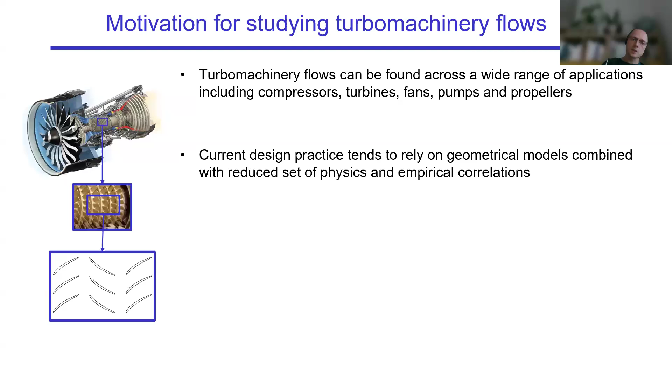Current design practice for those rotating machinery tends to rely on geometrical models combined with reduced set of physics and empirical correlations. These methods are well validated for existing systems, but the problem is that if we're trying to design outside of past experience, these methods are not validated for them anymore and they struggle, which means that design innovation requires accurate modeling beyond the current design envelope.

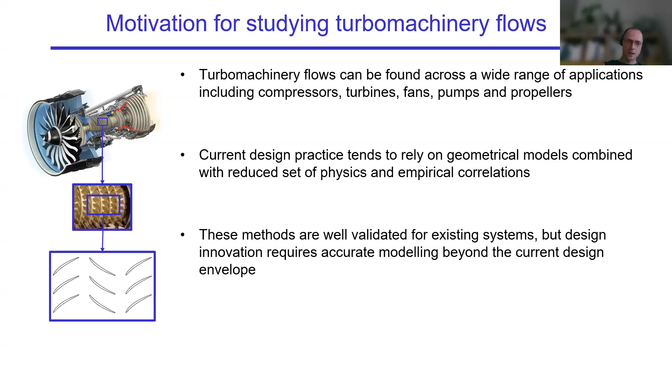Then on top of the limitations of the low fidelity methods, some of the methods require certain assumptions. For example, URANS requires a so-called spectral gap between deterministic and stochastic unsteadiness, which is that gap represented between the large and the small scale, which is in practice hardly ever present. The design trends tend to be such this gap becomes smaller and smaller or non-existent as the machines become more compact and work on higher work coefficients or require more work to be done.

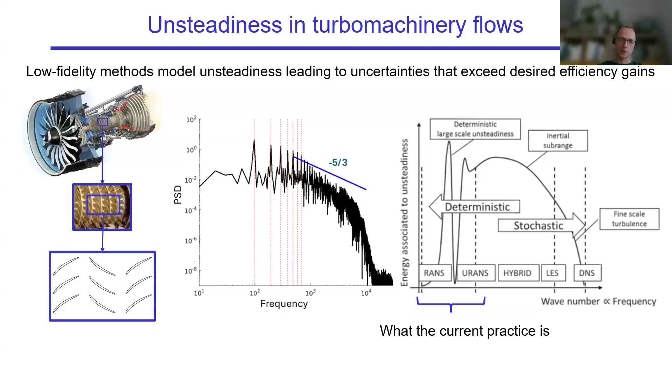So if we look at what such a flow field may look like, here is an idealized compressor made up of stationary and rotating parts. What's interesting about it is that axial compressors offer an interesting test case for studying unsteady interactions. So it's both interesting from the fundamental perspective and from the practical perspective, since those flows are a backbone of power generation and aerospace aero engines.

So they're worthwhile studying. Even starting from clean inflow, we can see that there's a lot of unsteadiness that gets generated across the flow path, and that unsteadiness arises due to the propagation and accumulation of wakes and due to turbulence generation in upstream passages. So the turbulence that we see here, obviously there is some component of it at the very end. I don't know if you can actually see, maybe I can use the laser pointer here.

The turbulence or the unsteadiness that you see at the end has some coherent or discrete component due to rotor wakes, but a lot of turbulence in between comes purely from accumulation from previous stages.

What's also interesting is that after several blade rows, turbulence reaches a sort of equilibrium as overall passage turbulence production balances the dissipation. So if we take, for example, this blade row and this blade row, and compare them on a statistical basis, you'll see that they're very similar to each other. So at some point, those turbulence quantities and their impact on the flow field sort of saturate and become repeatable to an extent.

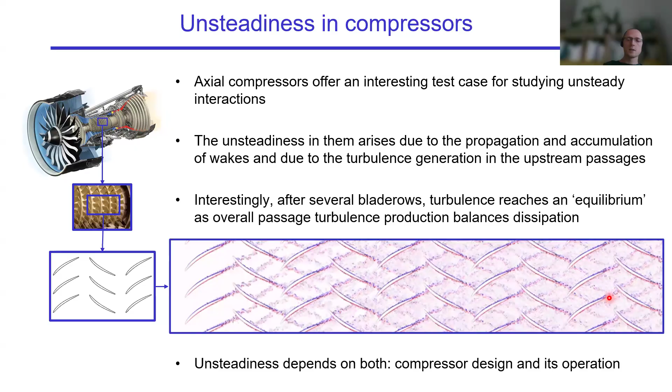Another thing to mention is that the unsteadiness we see here depends on both compressor design and its operation. So as an example, we can look at one of the design choices of the multi-stage compressor.

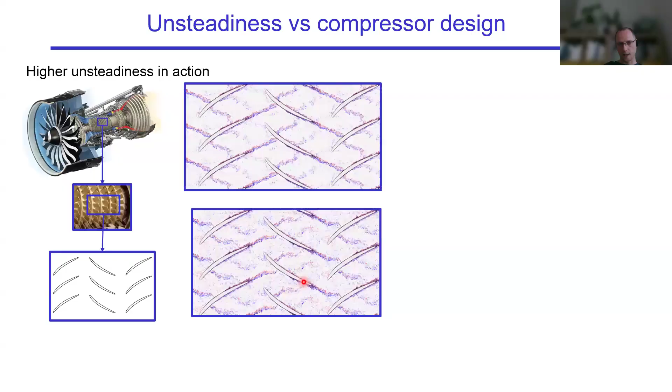If we take a baseline design and decrease the gap sizes between subsequent blade rows, this has an impact on the unsteadiness that those two flow fields show, and that translates to, for example, higher deformation of wakes, higher unsteadiness levels, etc.

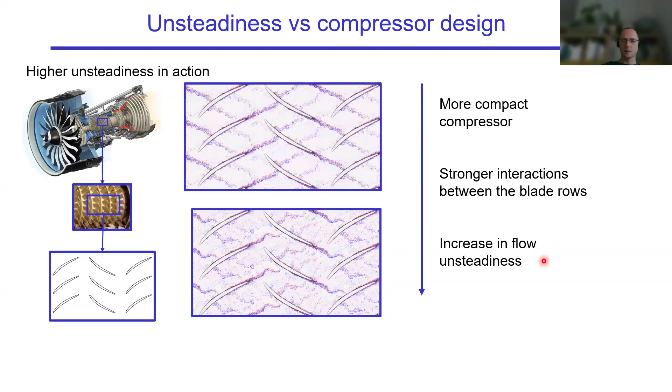So this can be summarized into this flow of thoughts: more compact compressors lead to stronger interactions between the blades, and that tends to increase flow unsteadiness. It's important to consider because turbomachinery blading has to be designed to operate in those highly unsteady environments. At the moment, that is hugely simplified.

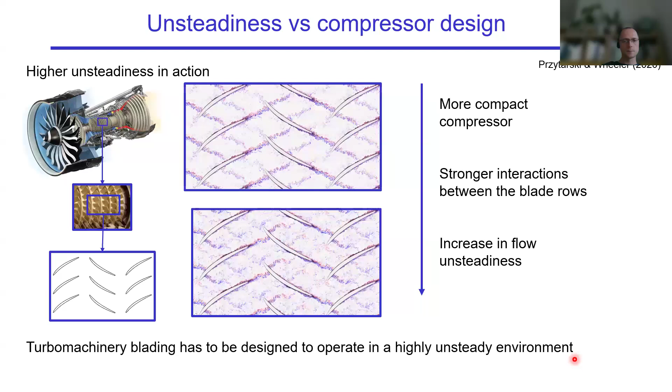Another aspect of it is that unsteadiness depends on the operation. Even though we may design compressors for the cruise conditions of a plane, which is where the gas turbine operates most of the time, it also needs to be able to handle conditions at takeoff, during the ascent, and during the landing descent.

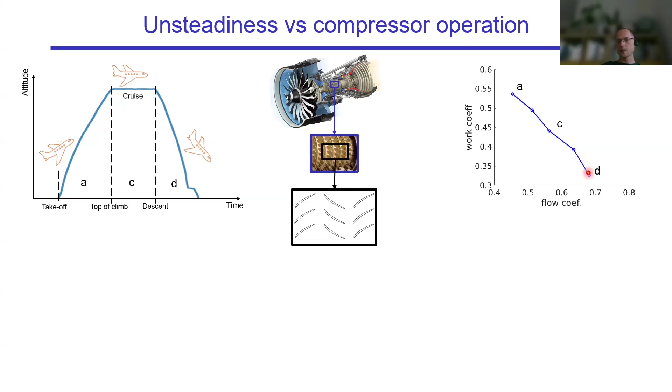That translates to different places on the so-called compressor characteristic, with descent requiring less work than ascent. That also translates to very different flow fields, which we can also look into. So this would be the on-design conditions, the conditions that the compressor would be designed for, which minimizes the loss.

On the left-hand side, we have this takeoff condition that is highly unsteady, and you can see a huge difference in the flow field, specifically due to the thickening of the suction side boundary layer, which then translates into a more unsteady flow field downstream, and that has a kind of feedback effect on the blade.

And on the opposite end, during a descent, the pressure side, so the bottom boundary layer, thickens, and that also increases unsteadiness to a certain extent, but not as much as in the first case.

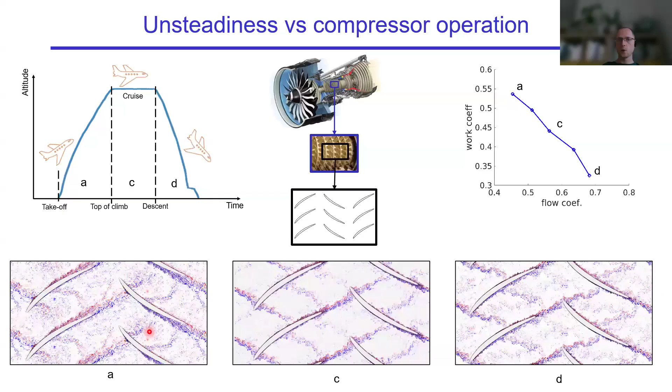And then we can statistically characterize those flow fields. For example, we can compare them to some experimental data from different research compressors. These are the C106, CIT, LSRC—so these are the Cambridge University compressors. These studies were done in the past. The blue dots correspond to the simulations that I showed you last.

This point corresponds to our descent condition, so when the plane is landing, and this condition corresponds to our ascent, where the plane is taking off. You can see that the trend roughly follows what the experimental compressors show. The differences are due to design, the simplifications of the setup, and so on.

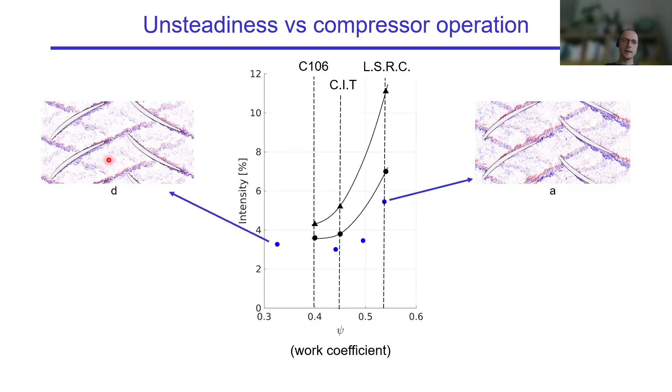And then we can also look into those flow fields and extract the free stream spectra. By the way, in case it wasn't clear, all the data I'm showing is computational. These are scale-resolving simulations, of well-resolved, highly well-resolved LES/DNS resolution.

And these spectra come from those computational simplified setups of multi-stage compressors. You can see how the spectrum changes between those two cases. I'm not going to go too deep into it, but this is just to show you that unsteadiness plays a big role, and it's dependent on both the operation and the design of a compressor.

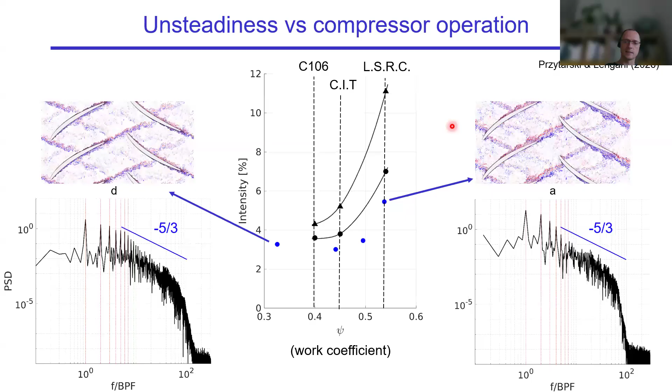So that's a little bit of background on why it's worthwhile to study the unsteadiness and why it's both interesting from a fundamental perspective and from the kind of industrial application standpoint.

Now going to large-scale flow decomposition. High-fidelity simulations, like I showed you before, are very expensive. These sorts of simulations would take millions of CPU hours or tens of thousands of GPU hours. So it's important to extract knowledge and derive models from them as much as possible.

Historically, or typically, we would collect flow data sets—time-averaged data, phase-averaged data, maybe probes in the free stream, snapshots for visualization purposes. But the problem is that you already need to have a hypothesis on what sort of physics you're fishing for before you define those data sets that you're planning to create and collect. So standard approaches utilize only a fraction of available data and tend to rely on expert-driven analysis—you as an expert need to decide what you're interested in before you perform such a simulation.

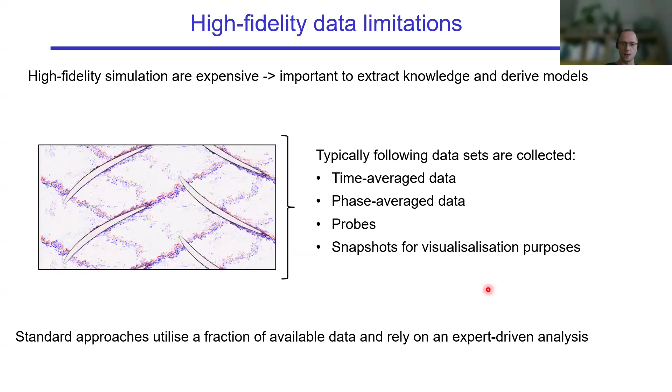So an alternative to that is scale decomposition applications. Many people have heard of methods such as POD, proper orthogonal decomposition, DMD, dynamic mode decomposition, and such. What these methods allow us to do is split the flow into multiple components.

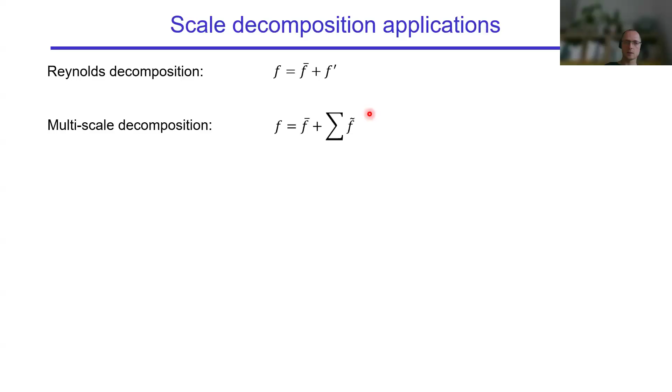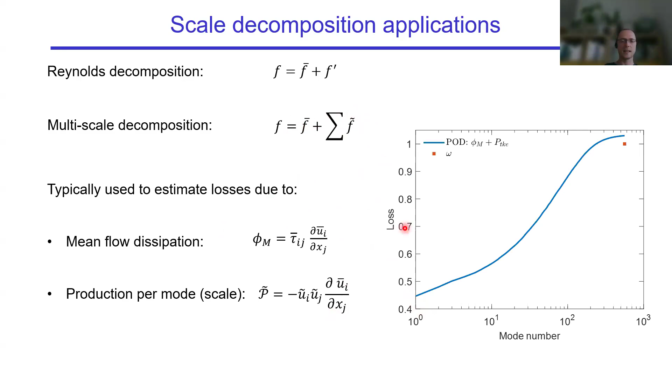Instead of performing a standard averaging, the so-called Reynolds decomposition, where we split the flow field into mean and fluctuating components, we can perform a multi-scale decomposition where we retain the same mean, but then have multiple modes which build or correspond to our flow field. This analysis tends to be used to estimate losses due to various dynamics. We can compute mean flow dissipation due to mean strains and the production per each scale or mode, which tends to look like this, where we can quantify loss or turbulent kinetic energy, production, dissipation, versus a mode number.

That's all nice because it helps identify lossy dynamics compared to the classic Reynolds decomposition, but it has certain limitations. Nonetheless, it's a good first step to create a multi-scale description of the flow.

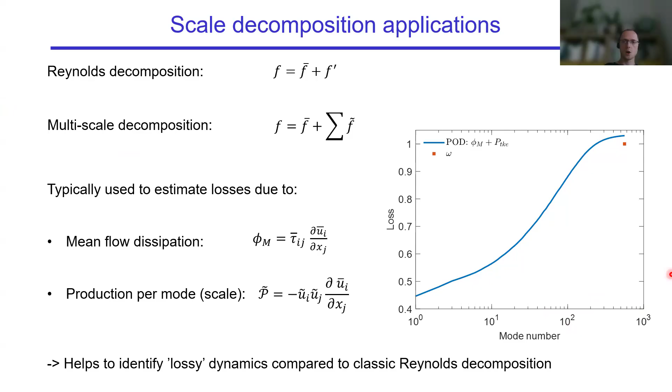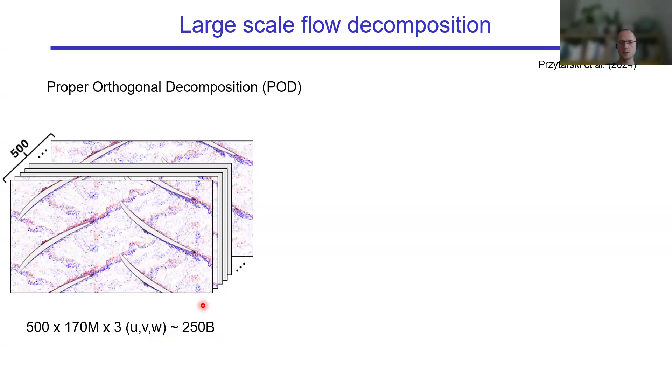To perform that, I'm going to show a method using proper orthogonal decomposition, where we collected 500 snapshots of this simulation. The section of the simulation I showed you corresponds to roughly 170 million points, and we collect 3 velocity components, UVW. That corresponds to roughly 250 billion points altogether. You can put that into a huge matrix and solve an SVD problem that splits the flow field into spatial modes and temporal coefficients.

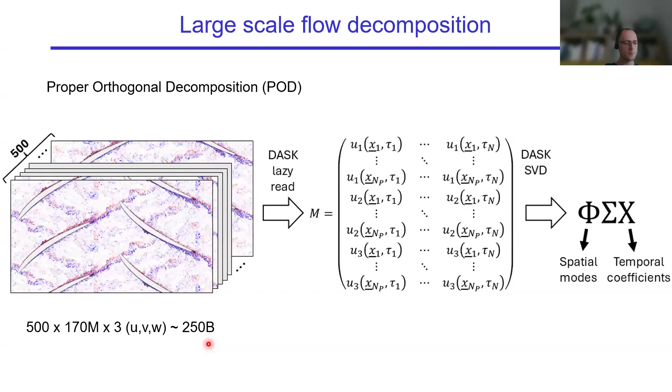To show you what those look like, here is a selection of modes that proper orthogonal decomposition gives you. Mode 1 is strongly related to the wakes that the upstream rotor leaves, and you see strong signatures of those rotor wakes. Mode 40 corresponds to large-scale structures within the boundary layer, and mode 400 to small-scale structures. This gives you an idea that POD decomposes the flow and sorts it into dynamics or scales of different size.

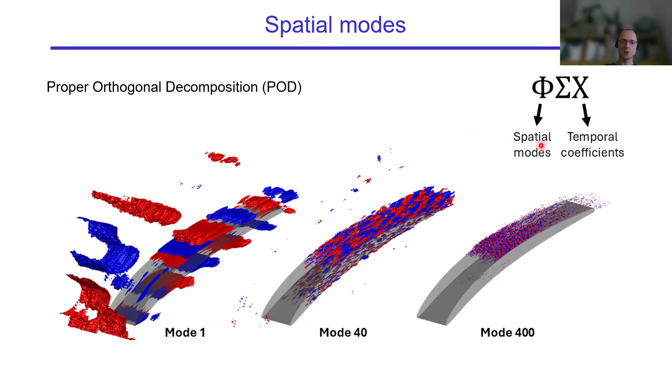Together with spatial modes, each spatial mode has an associated temporal coefficient attached to it. Mode 1 has a purely sinusoidal, periodic, repeating pattern of temporal coefficient. Mode 40 looks like this, and mode 400 looks like that.

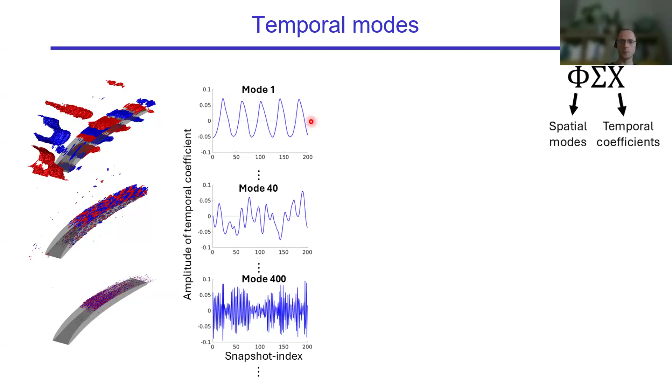To give you a better idea of what POD did and what those modes correspond to, we can perform an FFT, fast Fourier transform, on each of those signals, and construct this spectrogram of sorts, where each mode can be translated into frequency and put on this graph. We see that mode 1 was purely related to the wake dynamic, with a single frequency present in it. Mode 40 has a broader spectrum that doesn't correspond to any of the frequency peaks. At the very bottom you see a broadening of spectra, which corresponds to dissipation scales within our flow.

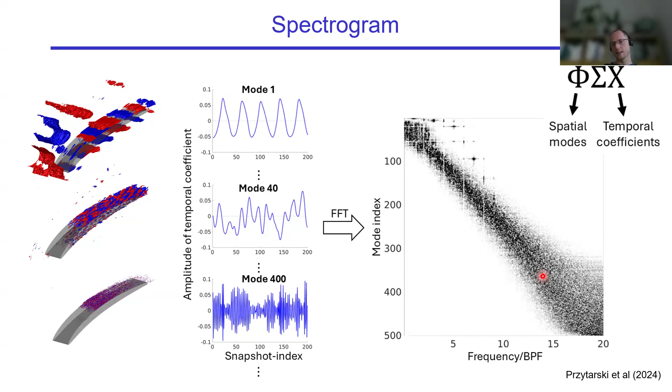If this reminds you of something, I'll be a bit suggestive, and compare it to our freestream spectrum, which looks qualitatively quite similar, where we see those peaks also represented through the mode decomposition. You have a fairly broad inertial subrange, depicted here as this linear band of frequencies found by the mode decomposition, and then a broadening of spectra due to the dissipation spectrum at the bottom.

So data-driven methods such as those can identify and isolate dynamics and coherent structures within the system. That's pretty convenient. Now that's not all the story, which leads me to the next point: the multi-scale kinetic energy transport equation formulation. While those data-driven methods can decompose the flow and characterize it on a spectrogram like this, giving a nice qualitative understanding of what's happening and which mode corresponds to what dynamic,

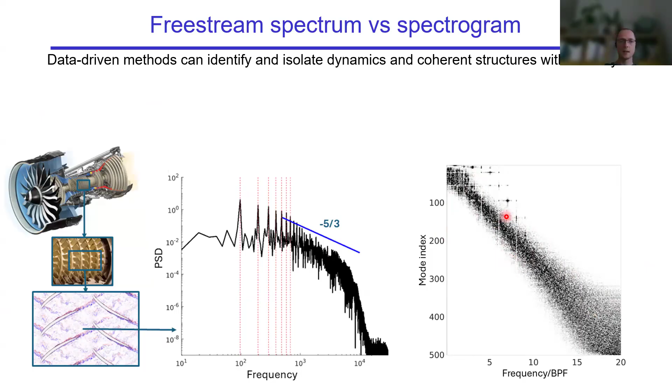the dynamic importance of each mode is actually unknown. That information, which modes are dynamically important for the flow physics, is embedded in the so-called triadic interactions. These interactions show the pathway of energy from the mean flow to turbulent dissipation. Turbulence production calculates how much energy is extracted from the mean flow. Triadic interactions show how that energy, taken from the mean flow or the inflow or anywhere else, cascades down towards the dissipation scales.

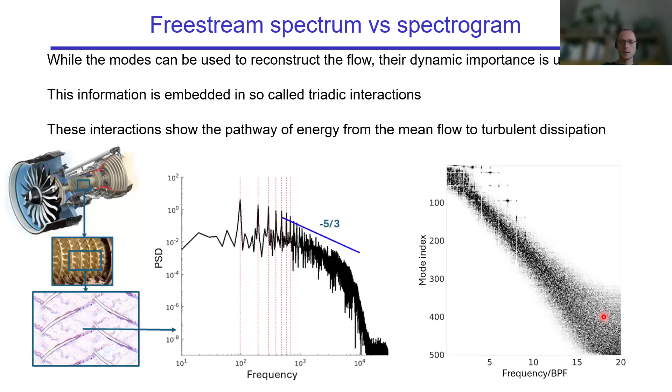Triadic interactions have this aura about them that they're difficult to understand. So I'm going to present an intuitive way to understand them, which will set up a framework for what I'm going to show you in the future.

Typically when we collect the data or decompose the flow, we do the Reynolds decomposition, where we split things into the mean flow and the fluctuating component of the flow, the so-called turbulent field. So our total kinetic energy can be split into kinetic energy and turbulent kinetic energy.

These two have their corresponding transport equations. As you can see, those transport equations are almost identical. The only difference is the operation we're performing on them, where advection or transport of kinetic energy or turbulent kinetic energy is equal to production, dissipation, and diffusion. Now these terms are similar but separate because of the different operator working on them, except for production, which is shared. That production is a very important term because it couples the two transport equations.

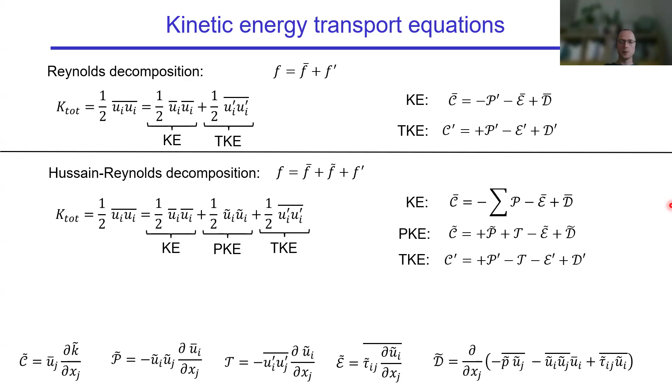But if we want to go to multiple scales, I kind of gave you an idea of what happens as you extend your decomposition into multiple scales. Instead of having three scales - the mean, periodic and fluctuating - you have mean and as many components or as many scales as you want.

So now total kinetic energy can be split into mean and turbulent kinetic energy. As before, the transport equation for the mean kinetic energy is exactly the same as with a triple decomposition. And the scale kinetic energy is effectively just an extension of turbulent kinetic energy and periodic kinetic energy. You can see that they both have a convection per scale, production for each scale.

There is a triadic component, or the transfer of energy, which can be both a sink and a source. You have a plus and a minus. There's a dissipation, and then there's the diffusion. So it's not such a big extension of what we've done in the Reynolds decomposition or triple decomposition to go from those two decompositions into a multi-scale decomposition.

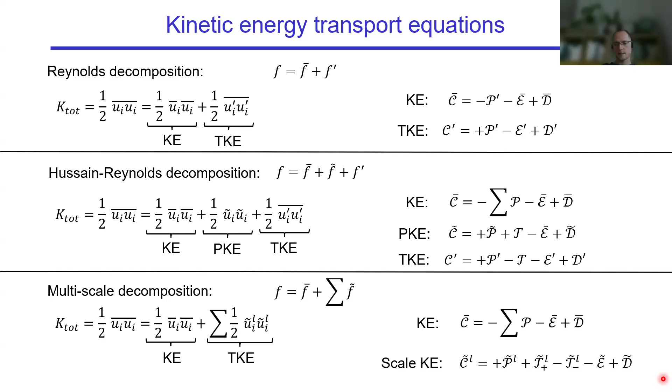And that's the sort of framework that we're going to keep in mind when we're going to discuss triadic interactions. So knowing that this is the case, let's try to quantify those energy transfer rates or triadic interactions.

If we look at the structure of these triadic terms, they look like this. This is similar to the production that I showed you before, where we have some sort of Reynolds stress and strain, except now those fluctuating or velocity components can relate to three different scales, L, M, and N.

That means that if we have many scales, we can potentially have interactions between all of them to the power of three. So for example, if we have 100 scales, each one of those 100 scales can interact with any 100 scales and another 100 scales to create a triadic interaction. That's why it's called triadic, because you have three different scales interacting with one another to manage the flow of energy.

So for our case, because we have 170 million points, and those triadic interactions can happen at every point of the domain, we have 170 million points. We have 500 snapshots, which means we have potentially 500 scales, and they can interact in any combination. So we have potentially 170 million times 500 to the power of 3 potential triadic interactions, which translates to a very large number of 2 times 10 to the power of 16.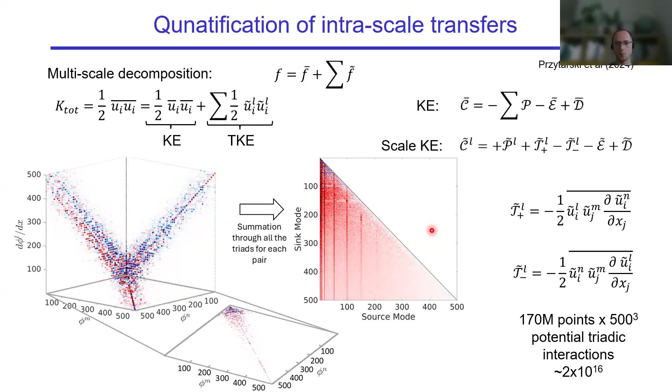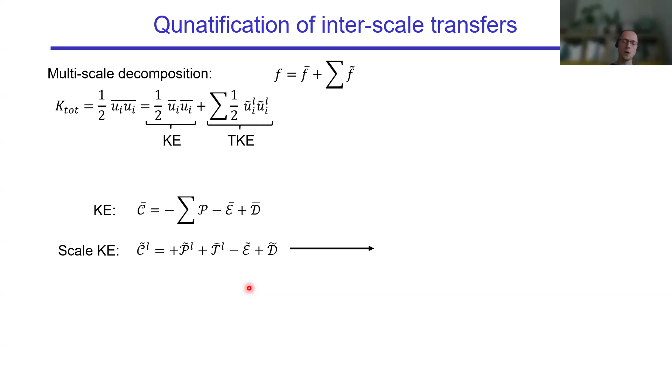Now, once we have everything split up into those scales, we can also perform budgets on those flows. So for each scale, we can quantify the production within the flow. We can also quantify the dissipation, how much each scale contributes to it. And we can show the net triadic effect or net triadic transfer each scale has.

What it means is that the scales below the zero line on the net act as a source of energy and transfer energy down the cascade. And on the positive end of the spectrum, those scales on average receive energy from the larger scales.

We can also quantify advection, and the work to obtain all the diffusion terms is still ongoing, but we can see what the residual for each one of those scales is. That still requires future work, but it shows we're very close to balancing the budget, not just for the entire flow field or just in the boundary layer.

We're balancing the budget of scale kinetic energy for each scale across the entire spectrum. And we can understand what role each one of those scales plays in this behavior that is governed by those scales.

For example, the very interesting point on the triadic transfer rate, the blue line, is the crossover point, where these scales are mostly generating energy and sending it down the spectrum, and these other scales are only receiving energy.

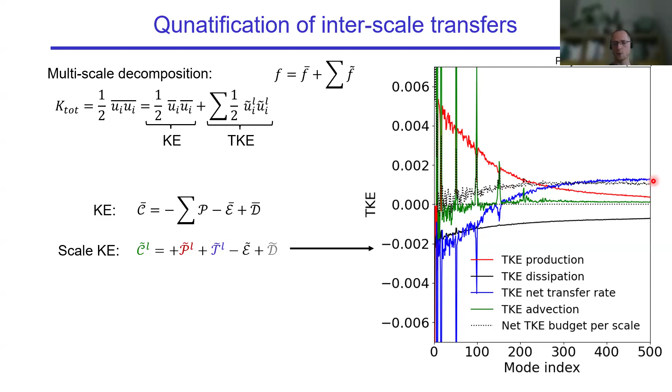Now, I don't know if we have enough time, because I'm not sure how long the presentation is supposed to be, but I can talk about the impact of the state space. I'm going to skip through those slides and jump into the summary and future work, and if we have time during Q&A, I can revisit those topics. I'm just going to jump through this, and then we can come back if anyone wants to discuss it in more detail.

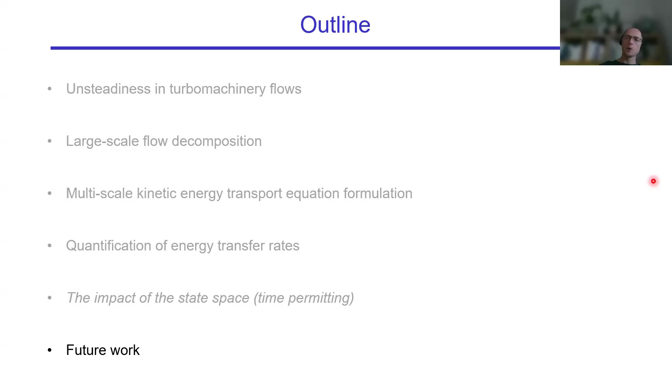Now, finally, we were able to both decompose the flow and quantify all the triadic interactions within it, so we can discuss the future work. This decomposition and evaluation is very powerful because it allows us to transform this complex simulation and represent it in the form of a dynamic system.

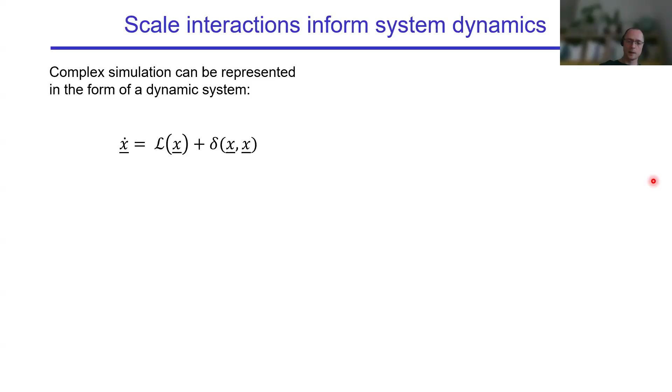It's a very popular idea that has been pursued by multiple authors. But what it basically means is that now that we have decomposed the flow into spatial modes and triadic interactions, we can effectively transform our flow into a problem where the derivative of the flow is the sum of a linear component and a nonlinear component, where the linear component corresponds to those spatial modes and the nonlinear component is effectively embedded in the interscale transfer rates. Many people study that; for example, the DMD method tries to estimate that linear relationship.

This stems from the Koopman analysis, while resolvent analysis tries to understand the impact of forcing on the amplitude of the flow and how the two are related. The fact that we can decompose the flow and evaluate both terms means we can construct low-order models and assess control strategies, for example switching certain dynamics on and off to see the impact on the amplitude of the resulting field.

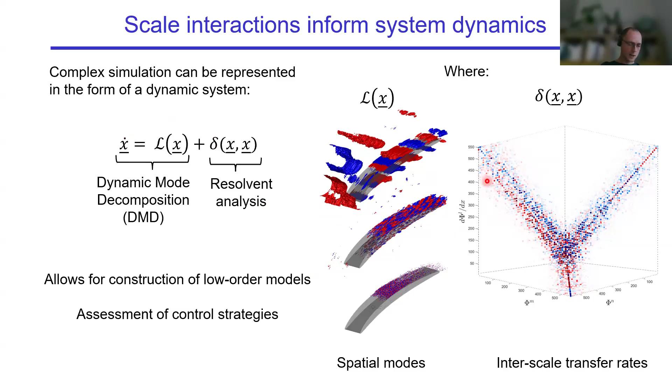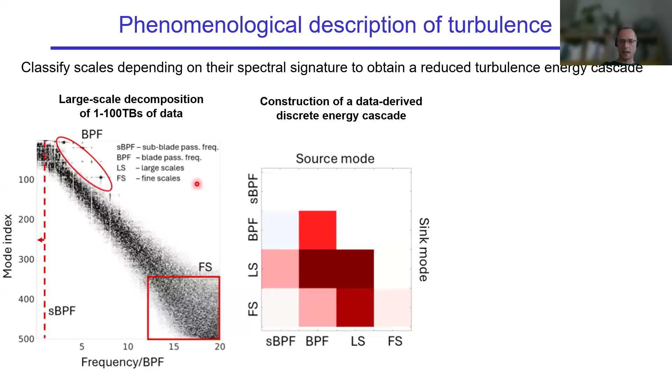Another direction for this work is classifying scales depending on their spectral signatures to obtain a reduced turbulence energy cascade. For example, we can take scales related to blade passing frequency and its harmonics, the sub scales at lower frequency than blade passing frequency, the dissipative fine scales, and leave the rest as large scales. Then we construct the reduced data-derived energy cascade as a phenomenological description of the energy cascade.

This is a very simple split, but you can imagine hand-picking modes related to Kelvin-Helmholtz instability and understanding how those modes transfer energy down the cascade, to see which frequencies are most important for that transfer, and for control strategies, which dynamics you want to avoid more than others. This gives an array, and its visualization lets you see how dynamically different dynamics connect to one another.

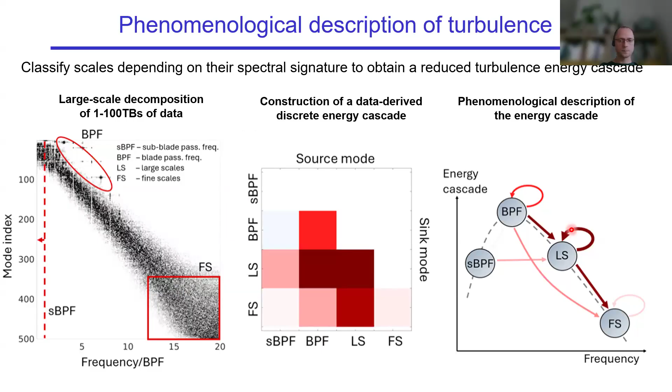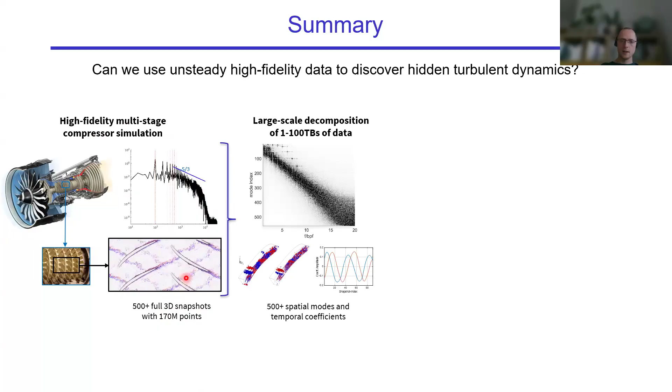To summarize, we're trying to answer the question: can we use unsteady high-fidelity data to discover hidden turbulent dynamics? We used a high-fidelity multi-stage compressor simulation, extracted 500 full 3D snapshots with 170 million points each, and performed a large-scale decomposition — roughly 5 terabytes — splitting the dataset into the spectrogram, resulting modes, and temporal coefficients.

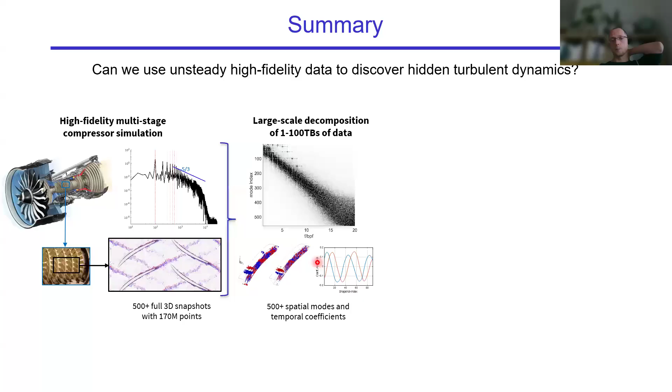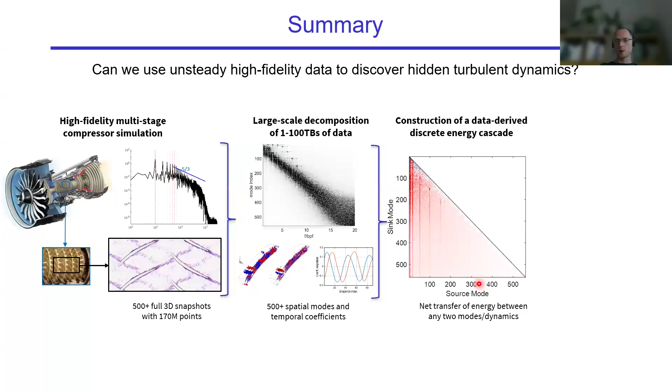Then we compute all the triadic interactions that play a role in the simulation, purely data-derived without cutting corners — we don't assume which interactions are important, we evaluate them all. This lets us construct a data-derived discrete energy cascade carrying information about the net transfer of energy between any two modes or dynamics, and finally allows system reduction and dynamic system modeling on the dataset.

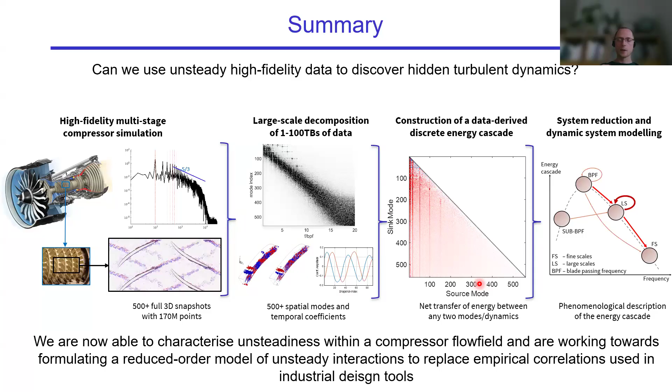All this work lets us characterize unsteadiness within a compressor flow field, and we're working towards formulating a reduced order model of unsteady interactions to replace empirical correlations in industrial design tools — all to cut off assumption-heavy augmentations and empirical correlations and replace them with something more physical.